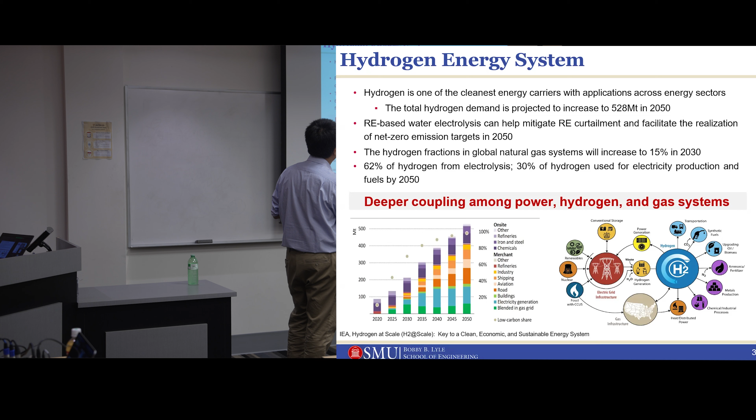There are some ways that you can produce hydrogen now. One dominant way is steam methane reforming, SMR - this is the major way of doing this. But if you do this with coal and gas, it's not clean enough, so we don't like that.

Another way is green - this is grid electricity-based electrolysis. In terms of transmission, you can transport hydrogen in tube trailers that just move hydrogen around, and you can also build small-scale hydrogen pipelines. I don't think we have many large-scale hydrogen pipelines yet, maybe in the future.

But another feasible, more efficient way of consuming hydrogen is to blend it into a gas system that we already have. Also, hydrogen is being consumed by many industries in the world - steel, agriculture. There are a lot of industries that can consume hydrogen directly without any conversion.

So the long-term goal is that we can do SMR with CCS, carbon capture and sequestration, and we can have renewable-based electrolysis, which is still small now. And we can have high-temperature electrolysis. The benefit of high-temperature electrolysis is that the efficiency of this technology is much better.

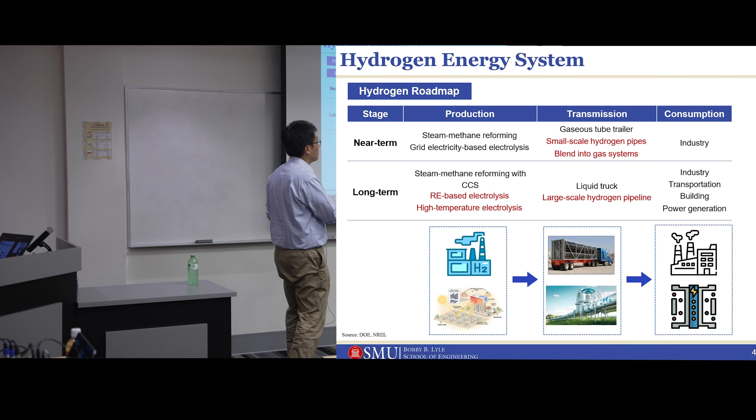So then the question we can ask is, how do you model hydrogen in the gas pipeline? We already have the gas pipeline, then you plug in another energy source, hydrogen. How should you model hydrogen flow in the pipeline? And what's the impact of doing that on power system reliability, cost, and all other metrics?

And then how do you model the electrolyzer operation? They can have multiple operation conditions: on, off, idle. So how do you model that? And what's the feasible region of that electrolyzer operation? Those are the technical constraints. And also, how can you model this hydrogen into the planning and operation of our integrated energy system?

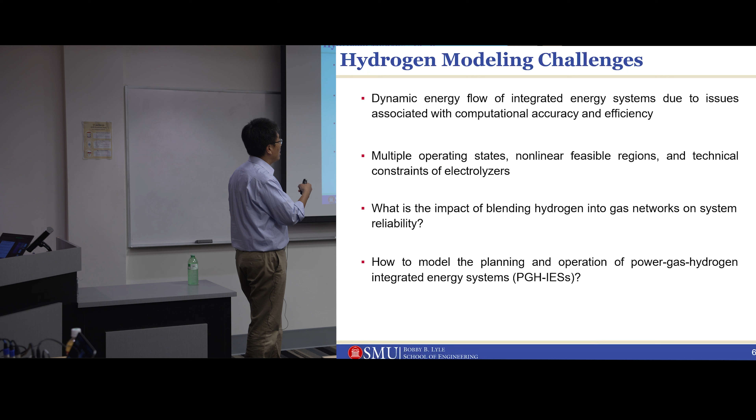So the first topic we are looking into is reliability assessment. This is kind of the context we are looking at here. Basically, we are saying that we can use renewable energy to generate electricity for the electrolyzers to generate H2 hydrogen.

The hydrogen can be put into a tank to store it for a period of time. It also can go through this methanation process to generate synthetic natural gas, or go directly into the natural gas system. So for doing this, you can see that we can have renewable generation as a source to generate hydrogen and go to this natural gas system, either through the methanation process or by just blending the hydrogen directly into the gas system.

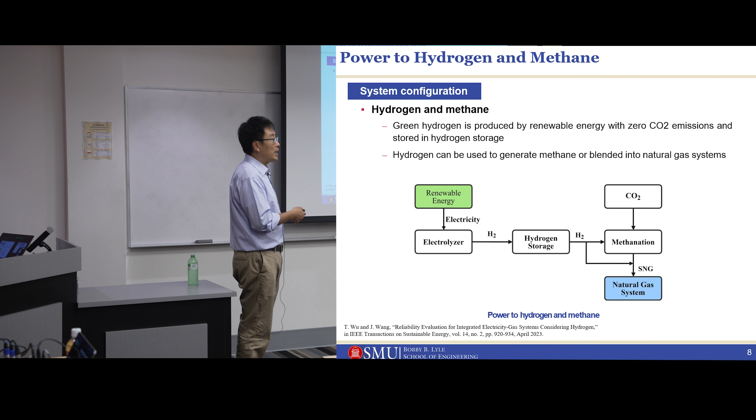So then the question we want to ask here: if you do this, what's the overall reliability impact, and how is that going to affect my traditional power system reliability indices, like LOLE and all other indices? So this is kind of the technical formulation that we have.

So basically, we are saying that you can model the hydrogen in some different ways. You can do this state equation, which is built on chemistry and physics. You can see that this equation basically sets up the relationship between the gas pressure, density, temperature, and other gas and pipeline related physical properties.

Because you have two different gases in the pipeline, it's all interrelated. And also those are the physical properties of those gas flows. You have the average molecular weight and the compressibility factor. The critical temperature is an important factor here, and the pressure of the gas is also very important.

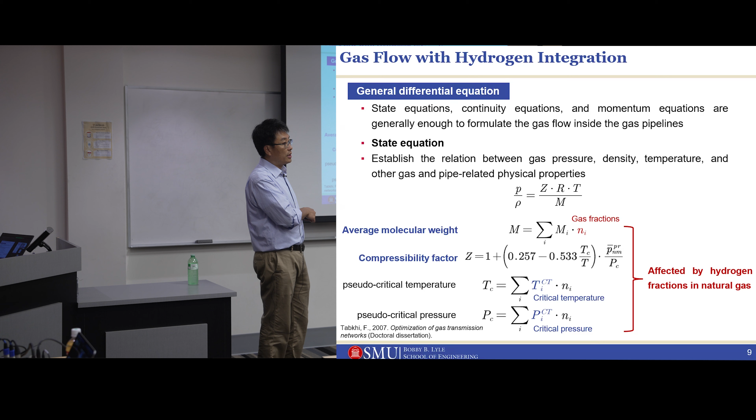So all of those equations are going to be affected by hydrogen fractions in the natural gas pipeline. So what I'm saying here is, if you increase the hydrogen by a certain percentage - 15, 20, 30 - all those parameters of those equations are going to change. So that's going to affect your technical calculation.

And then there are several fundamental equations that you can use to model the gas flow. It doesn't show completely here. Oh, okay, I don't know what's going on. Maybe something is lost during my PDF conversion process here.

So in that case, this is one of the equations, a continuity equation. Basically, this means you should have this principle of conservation, which is one of the fundamental equations for fluids, right? So you should have that continuity equation. This is not an easy equation to solve, but if we can define this gas flow rate, you can have this equation. Just imagine you have this equation, even though it's not shown here, sorry.

And another equation is a momentum equation, which models all the forces that are being imposed on these gas particles. This is another equation normally associated with gas flows. This equation is not easy to solve either, as you can see, it's fairly complicated. So if we neglect the gravity effects, inertia, and kinetic energy, we have this simplified version of the equation.

So those two equations are partial differential equations, which are not easily combined with a MIP solver, right, with MIP formulation, and we don't even do that.

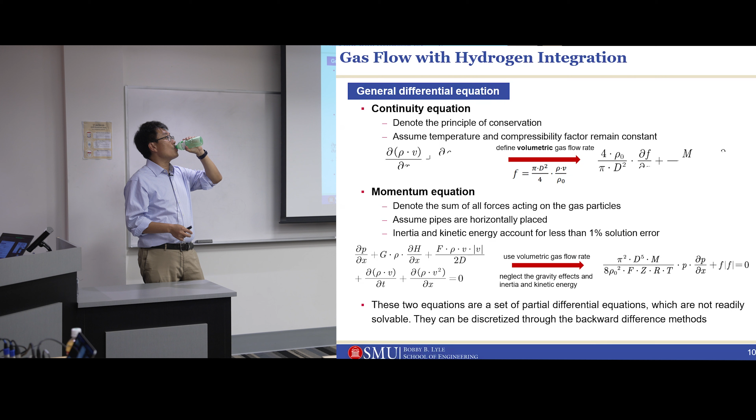So we have this more simplified version of doing that. We can discretize those partial differential equations using the backward difference method, so you get equations which are more easily solvable compared with the partial differential equations.

So this becomes our new continuity equation here, and this becomes our new momentum equation here.

We also model this line-pack capability. Line-pack capability means that because gas flows, gas could be stored in the pipeline, so it does not disappear instantly. You always have some gas stored in the pipeline, and this line-pack capability provides certain storage capability. K1, K2 are coefficients related to the pipeline and the fractions of various natural gases. This line-pack capability is important, as I show here.

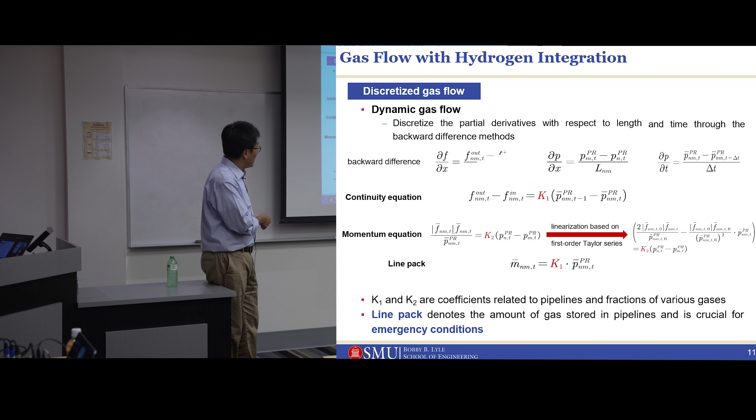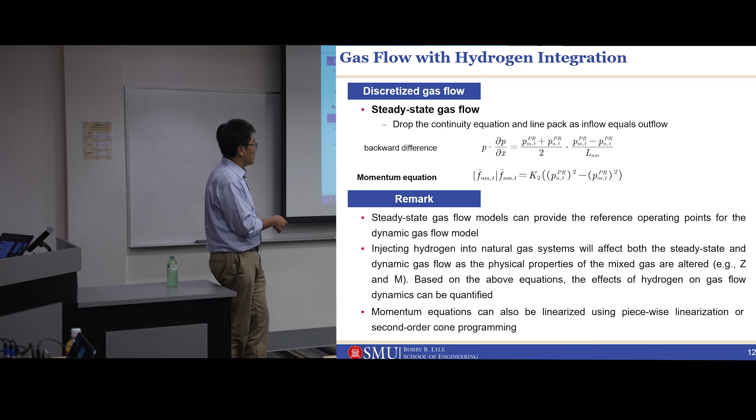The remark here is that the steady gas flow can serve as a base point, a base case, a reference point, so we can compare the dynamic gas flow with this benchmark. We are also going to inject hydrogen into a natural gas system to see how that affects both the steady state and the dynamic gas flow. Also, the momentum equation can be linearized using piecewise linearization and second-order cone programming here.

So this is the equation that I have. I just want to show you this: the cost of shed load, the generation cost, and the gas load. If you shed the gas load, you also incur a penalty for doing that. So this is trying to minimize the amount of power, gas load, and renewable energy curtailment. We want to minimize that, and we also have all the technical constraints here.

We have the power-to-hydrogen constraint, power-to-methane constraint here, and all the typical constraints for the power and natural gas systems.

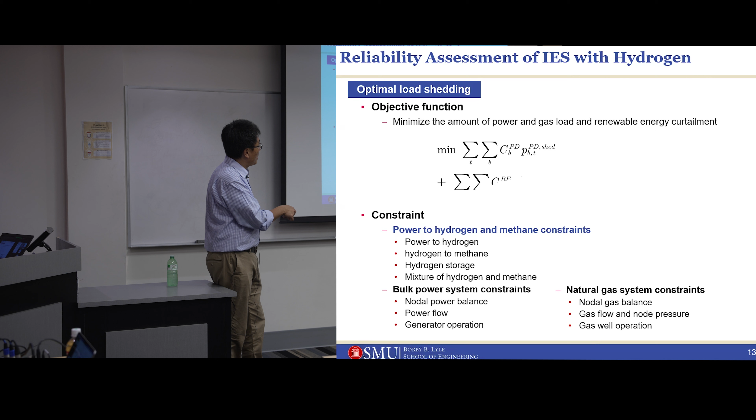So those are the reliability indices that we are going to use. Some of those are already used in the energy system: LOLP, loss of load probability, and expected load not supplied. Those are the commonly used indices in our energy system reliability analysis.

For the natural gas system, we have something similar: loss of gas probability and expected gas not supplied. For the wind farm, because we are also looking at how we can minimize renewable energy curtailment, we have loss of renewable energy probability and expected renewable energy not supplied here.

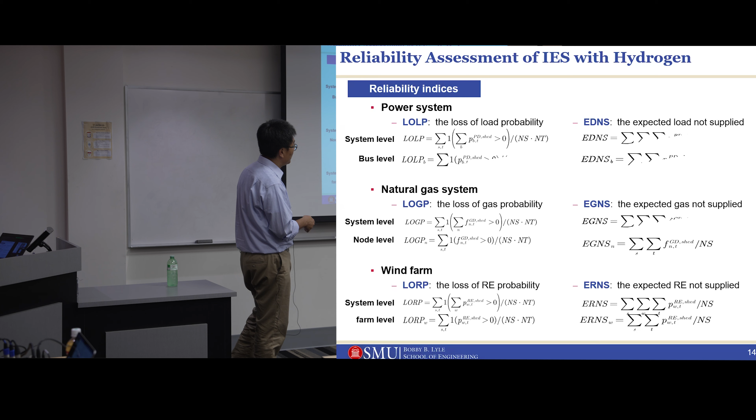This is the flowchart we are trying to use. Basically, you have one year broken into 52 weeks, and for each week we run the steady flow model first, because that can serve as a starting point and it's the fastest way to solve the problem. Then you solve the more detailed model using the dynamic model. After you're done with one week, you go to the next week. In the end, if the variance of energy shed does not change very much, you stop. So this is the flowchart, and after doing this loop, you can calculate all the reliability indices shown in the last slide.

So we have this IEEE 24-bus case here, and we also couple this power system case with a 20-node natural gas system. This is the power system, and this is the natural gas system, and they are coupled, as you can see. This is all made up, so we don't have any real system—that's something we have for now.

For the power system, we have 38 transmission lines, 22 conventional generators, and 3 wind farms, and the wind farms are at buses 21, 22, and 23. We also have 2 gas wells, 19 pipelines, and 2 compressors.

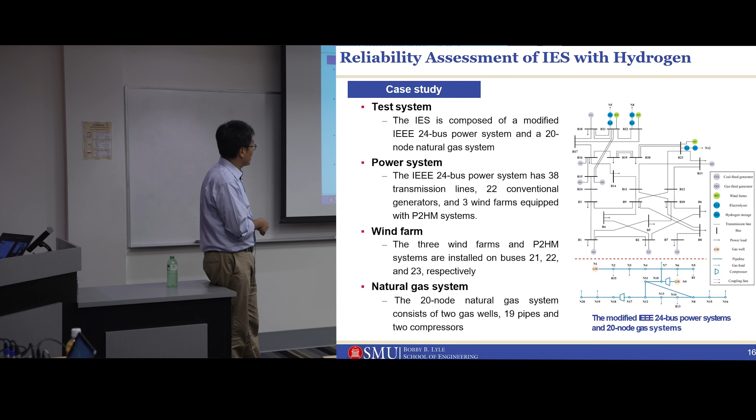Sorry. So we have 3 cases here. Case 0 is a dynamic gas flow with power to hydrogen and methane and hydrogen effects, which is the proposed model. Hydrogen effects mean that we capture all the dynamic flow characteristics in this case. C1 is a simplified approach where you only have a steady state gas flow. C2 is a dynamic gas flow with hydrogen effects, but there's no P2HM. So those are the numbers you can see after you run the simulation on this case.

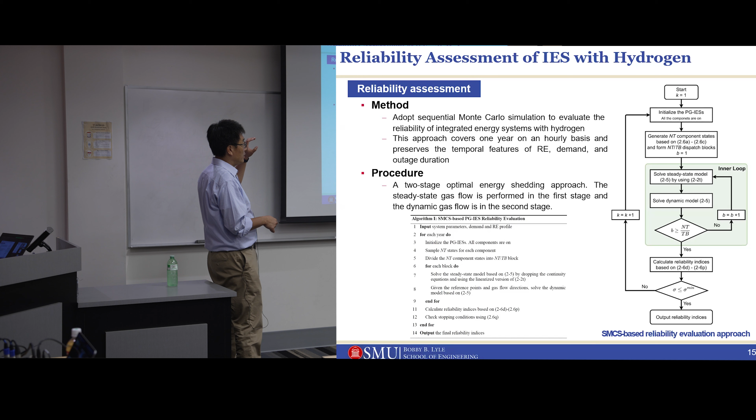So you can see that we have basically convergent results. Given this predefined threshold, if those variances in terms of energies or reliability indices are less than this threshold, you'll stop. Given all the thresholds that you can define, all the models can converge within certain iterations.

The best reliability performance is observed in the proposed model, C0, because it captures the most accurate picture of this hydrogen flow. The worst LOLP, LOGP, EDNS and EGNS occur in C1. The worst LORP and ERNS occur in C2. So you can see, you cannot draw a universal conclusion. It's pretty much case dependent.

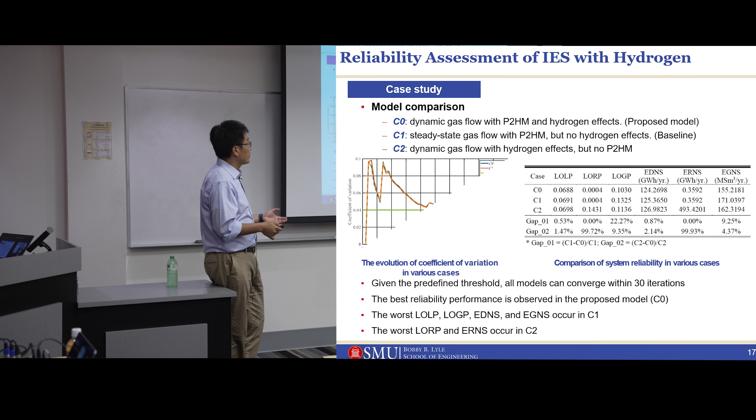But the idea is that even though you cannot have this common conclusion, you should still run the model, because the model gives you different results. You may get different insights by running the steady state model versus the dynamic model. So that's the key point message here.

This is the impact of gas flow dynamics. C3 is dynamic gas flow with hydrogen effects, and C4 is steady state gas flow with hydrogen effects. You can see that you have different results from this run, and hydrogen fractions have different impacts on reliability in those 2 cases.

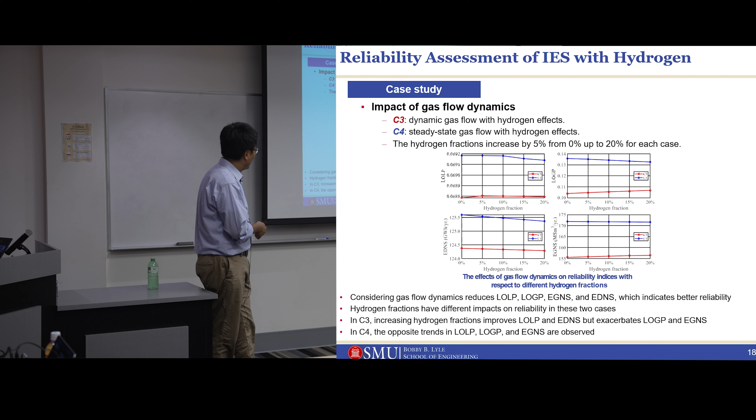Again, you cannot have this universal conclusion, but you still need to have a better model if you can. In C3, increasing hydrogen fraction improves LOLP and EDNS, but increases LOGP and EGNS. In C4, the opposite trend happens, so which is something new here.

I will skip this slide, basically the same thing. Okay, so for the second topic, I want to talk about this planning and operation, optimal operation of integrating energy system with hydrogen. Here we are basically looking at a more complicated scenario. We have hydrogen, we have heat, we have methane here.

Renewable energy can produce electricity, and we can have hydrogen here. You also have this heat supply here. You have a water circulation system. Water can be heated and provide heat to the district heating system here. That's another benefit. Hydrogen can also be blended into a natural gas system here, and hydrogen can also be consumed by hydrogen consumers directly.

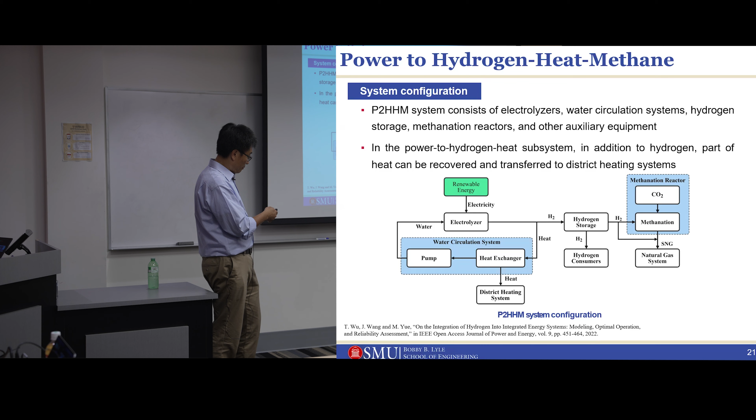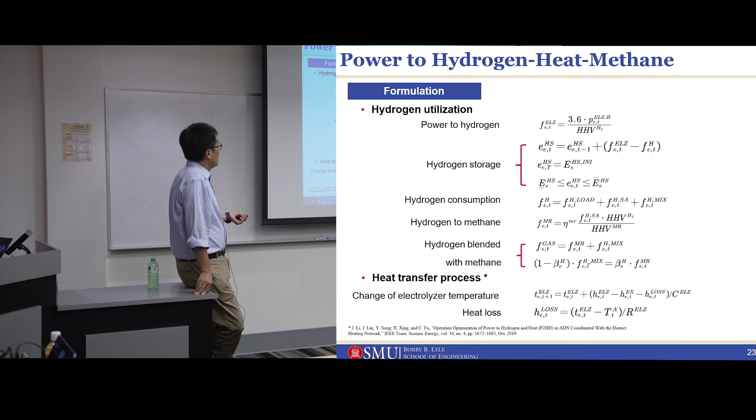We have all the hydrogen utilization equations here: power to hydrogen, hydrogen storage equations, hydrogen consumption, hydrogen to methane equations, and all those equations. We also model this because you also involve heat here. We learned from this paper that you can actually model this heat transfer process using the change of electrolyzer temperature and heat loss. So in that case you capture this heat modeling also in this combined model.

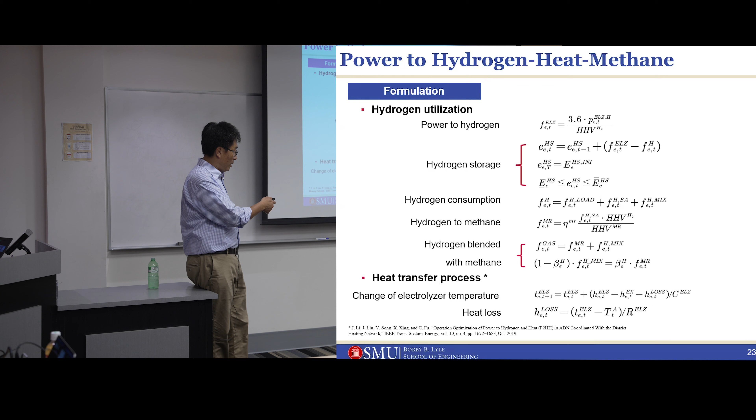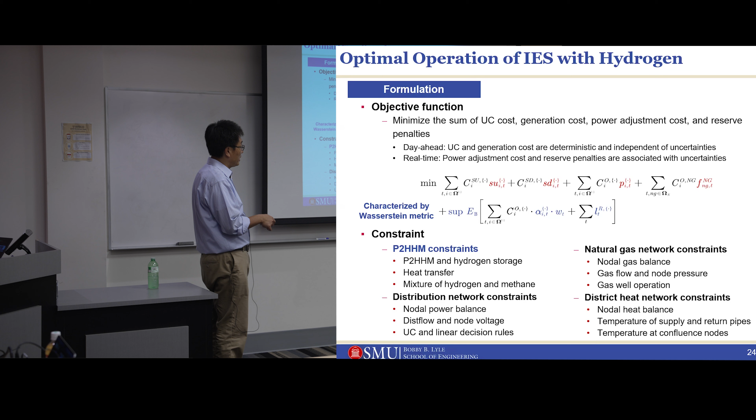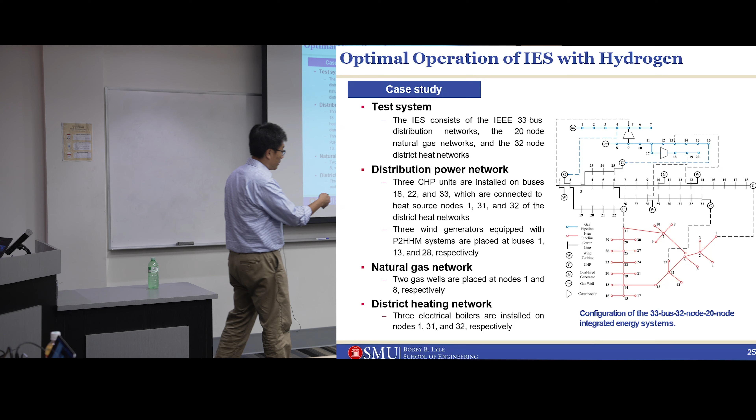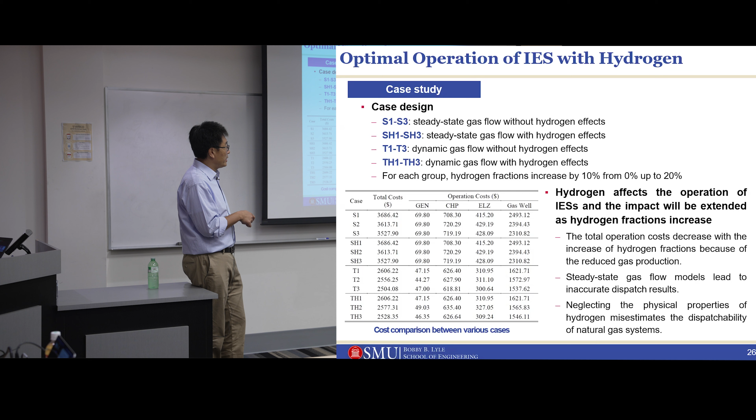And the steady state, which is a simplified version of the gas flow, as I mentioned earlier, can lead to inaccurate dispatch results. So neglecting the physical properties of hydrogen can misestimate the dispatchability of our natural gas system. So you don't want to do that.

So the last topic is the optimal planning of integrated energy systems with hydrogen hubs. This idea actually comes from Europe. Some researchers in Europe have been looking at energy hubs for a relatively long period of time. Basically, the idea is that you have different sources of energy. When you combine them into a hub, how do you model that? How can you do your planning and operation with that hydrogen hub, with an energy hub?

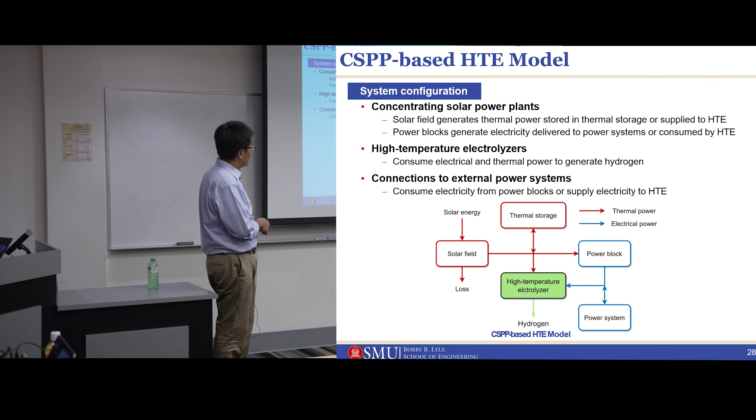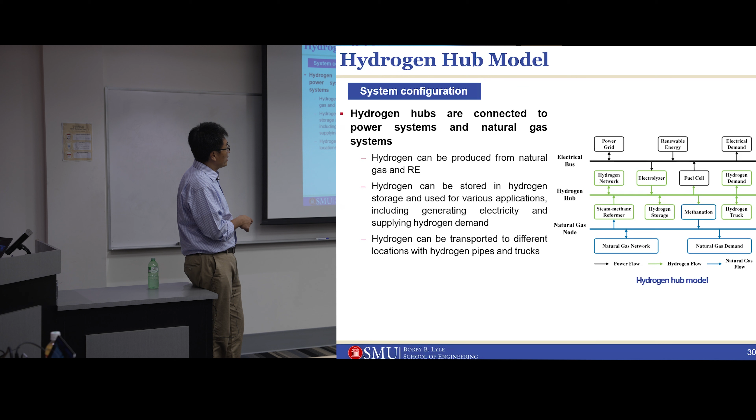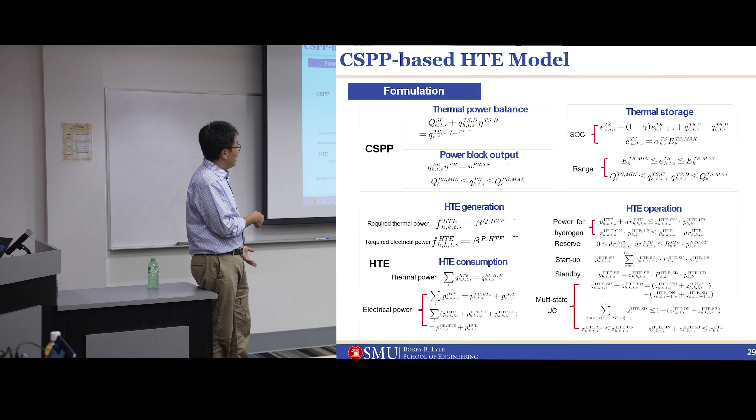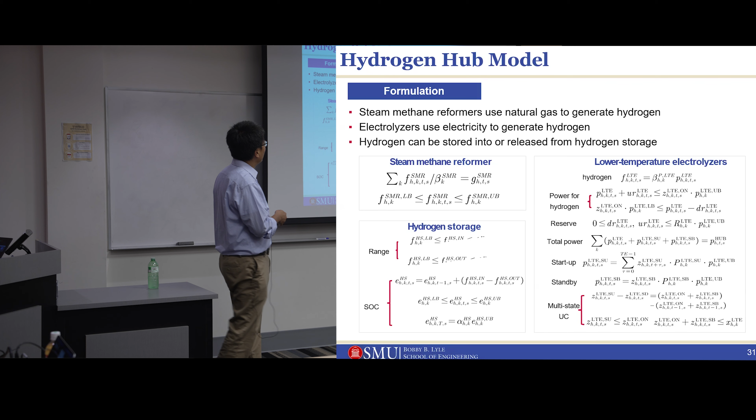And then we have low temperature electrolyzers here, as you can see here. In comparison, we have a high temperature one. Where is that? It's also in here, I believe, somewhere. I have a high temperature electrolyzer constraint here. And so those are the conversion constraints: hydrogen pipeline, hydrogen to electricity, hydrogen balance constraint.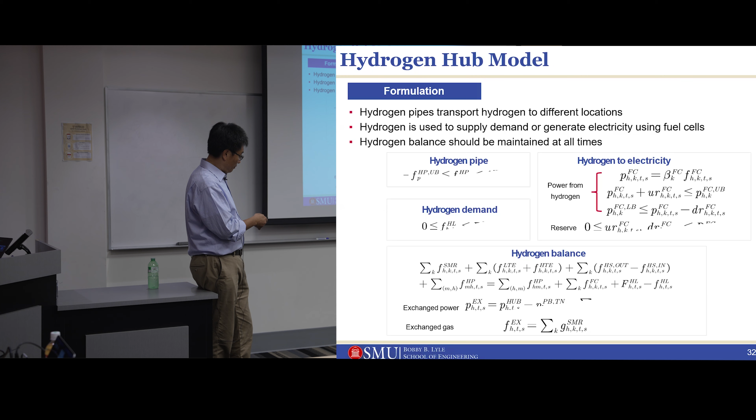And here, because we are looking at an investment planning problem, we want to look at what's the minimum investment cost that you can achieve. So you can see we include the generator and line investment cost, all the SMR related costs, and the electrolyzer investment cost, hydrogen storage pipeline investment cost.

So we are looking at multiple years in the future. We also consider the operation cost, because when you have those investment decisions made, you still need to simulate how those decisions are going to work in the operation scenario. So you need to calculate the cost over a day or hour for the entire year.

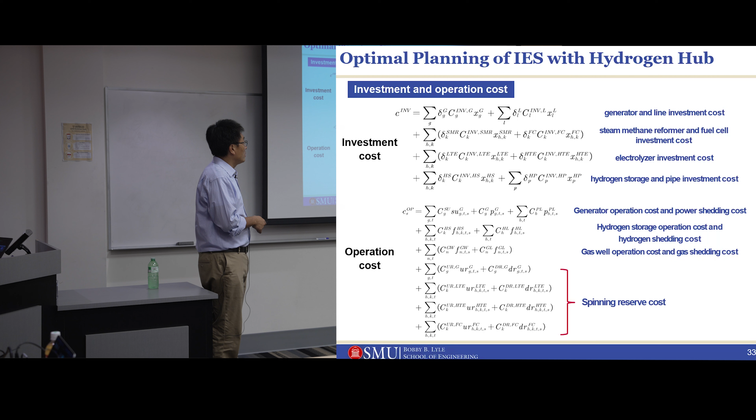So this is the operation cost that you can calculate here. We have generation operation cost and power shedding cost. We have energy and hydrogen storage operation cost, and all those costs are included here.

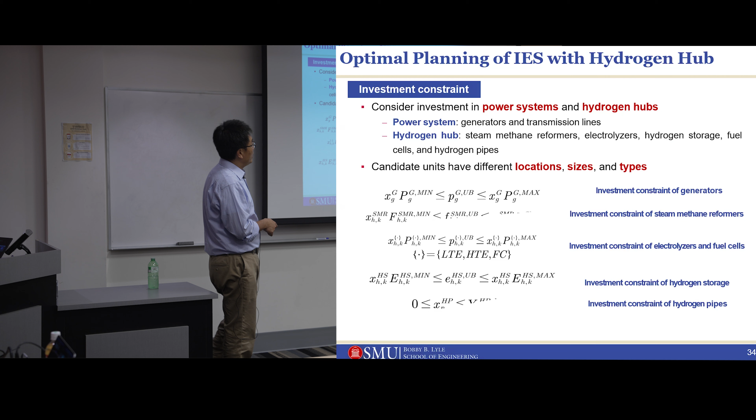The investment decision can have multiple candidates that vary by location, size, and type. Here you can see investment decisions associated with generator types, sizes, and locations, as well as electrolyzer investment decisions - low temperature, high temperature, and fuel cell - plus investment decisions for storage and pipelines.

This is the overall optimization formulation. You have investment cost, which is long-term decision-making cost, and short-term operation cost. We also have multiple scenarios to capture variability in terms of solar and wind. The planning decision relates to location, size, and type of technology, subject to a certain investment budget, along with operational constraints.

You have the CSPP-based high temperature electrolyzer constraint, as I mentioned earlier. You have the hydrogen hub constraint, the power system constraint, and the natural gas system constraint too.

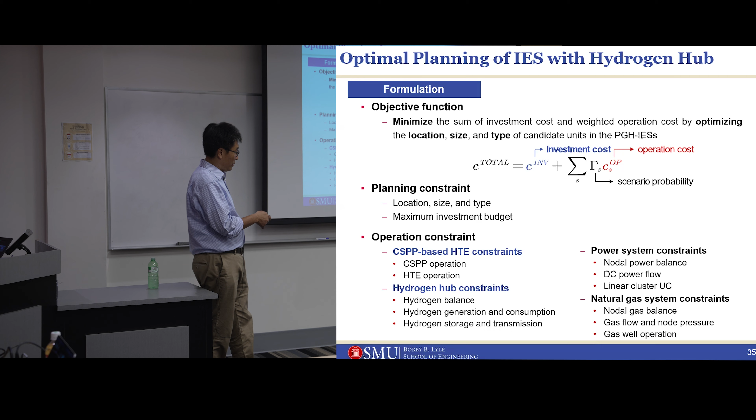We ran the problem in a 24-bus case with power system, hydrogen hub, and natural gas - you can see this is a mostly complete system that we have here. We ran a large number of scenarios: A1, A2, and A3.

A1 is the proposed stochastic programming-based planning model. A2 only considers low temperature electrolyzers. Case 3, we have an uncoordinated planning model without electrolyzers and fuel cells.

We can see that A1 has the least total cost, which is our proposed model here. A1's operating cost and total cost are smaller than A2 and A3. Those are also the decisions associated with the technology we want to invest in.

When you only consider low temperature electrolyzers in A2, that increases the total cost by 43.74 million, because the efficiency of low temperature electrolyzers is not as good as the high temperature ones. A3 has the highest total cost.

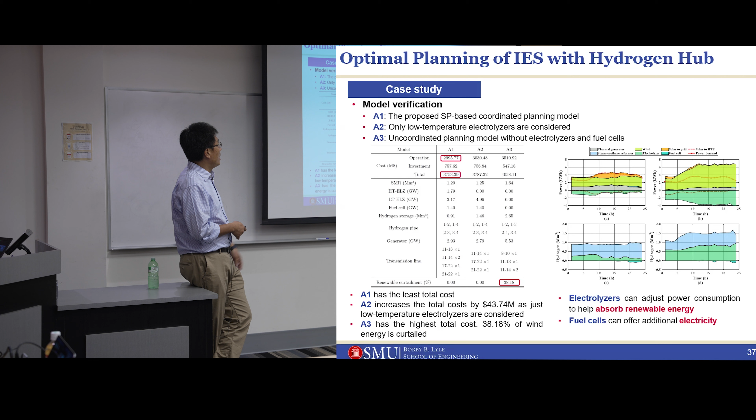The fuel cell can also provide additional electricity, because if you supply it with hydrogen, it can work as a battery. It can work as a generation plant when needed.

We wanted to verify the model further, so we tried a different operation modeling for those electrolyzers. In one case, we only model the electrolyzers with one state on. In case B2, we have two states, on and off. In B3, we have three states: on, off, and standby.

We have low temperature and high temperature cases. In case H, we have both electrolyzer technologies. If you look at all the different cases, you can see that the proposed model can reduce the total cost while being consistent with practical operations.

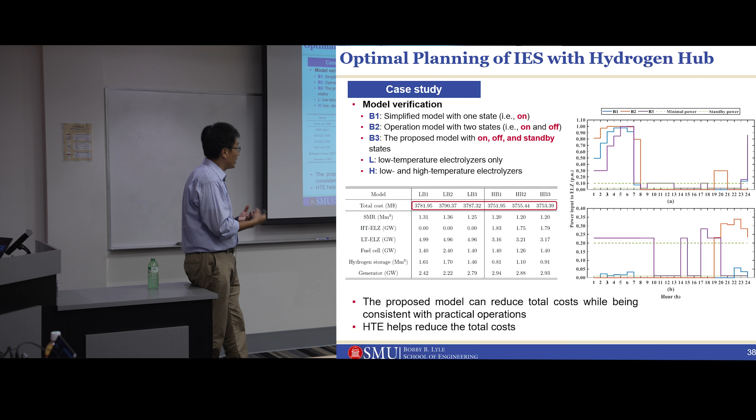Among all those cases, the HB1 case has a better result. The high temperature electrolyzer can also help reduce the overall cost, because again, the efficiency of this technology is much better.

We also looked at the computational performance of our model to see if it can be run on a larger scale. In this case, we tripled the system we just showed: 72 bus power system, 40 node natural gas system, and 8 hydrogen hubs. So this is the bigger system.

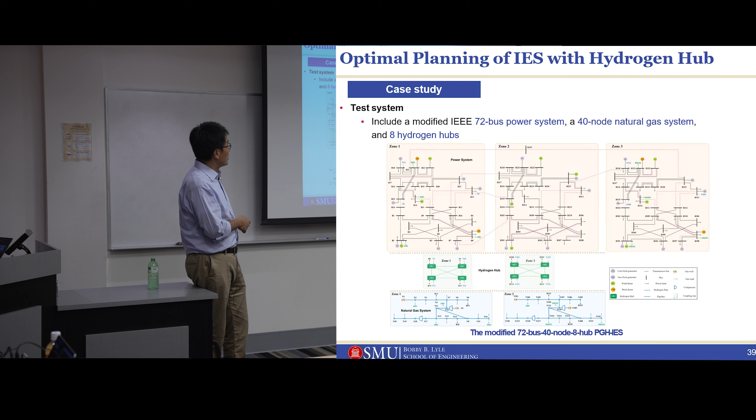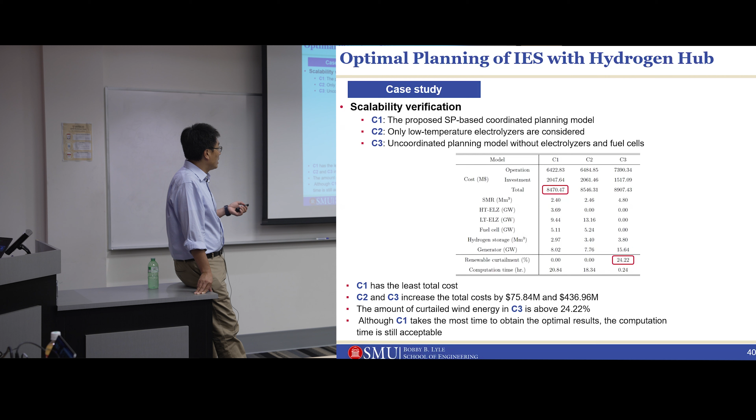It gives you more time to run. So that's the reason we are not really worried about this computational performance here. In the end, results can still be obtained within a reasonable amount of time, a few hours in our case.

So the conclusion is, I introduced how we think hydrogen can be modeled and introduced into the energy system. We looked at three different aspects: reliability assessment, optimal operation, and optimal planning. We also looked at different technologies and conversion processes: hydrogen to heat, hydrogen to methane, hydrogen coupled with concentrated power plants, solar power plants, and different electrolyzer technologies.

So in the end, the takeaway from our work is that hydrogen is still relatively new, and there's a lot more work that needs to be done. Here we are just trying to introduce this topic to you guys, so you can see how to tackle the modeling aspect of a hydrogen combined energy system. This is our way, our idea of doing this, and I'm sure there's a lot more that can be done.

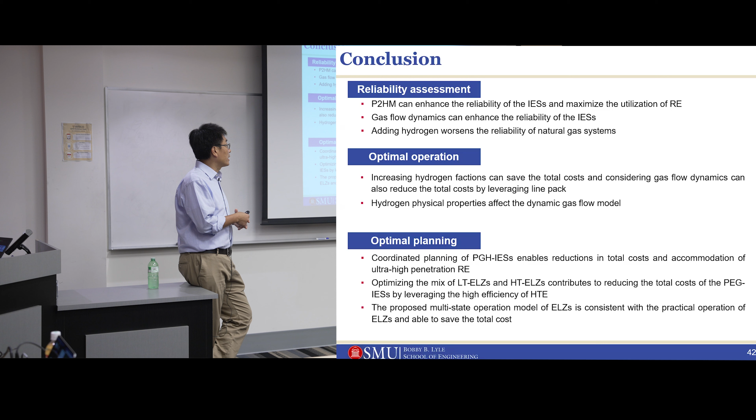So basically, if you want to model hydrogen more accurately, you need to capture the dynamic gas flow in the gas pipelines. When you blend hydrogen and gas, it's going to have an impact on the system reliability and on the system gas flows. So you need to capture that.

And also, when you throw hydrogen into the overall energy mix, it's going to have a coupling effect with other infrastructures as well, with heat, with gas, with others. Also, it consumes a lot of water too, so you need to consider water in this scenario as well. In the end, it's a really complex problem.

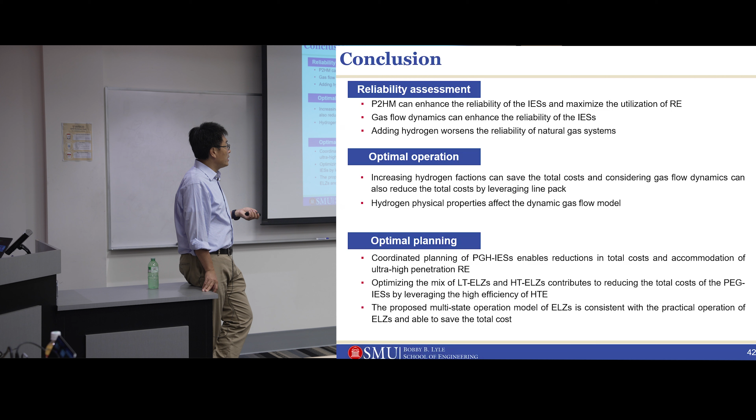So I just wanted to show some preliminary results here. I hope you'll become interested in this topic, and you can do more in the future. That's all I have. Thank you.